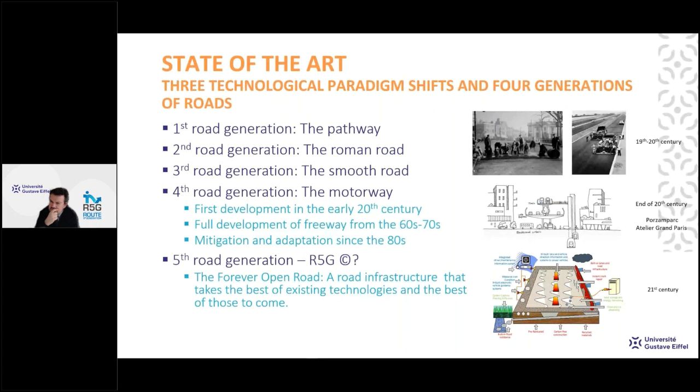That was the pitch of the Forever Open Road program, a road infrastructure that takes the best of existing technologies and the best of those to come. This was the pitch of the Forever Open Road in 2011, made by Germany, Norway, and the USA. That was the idea in 2011, in this scheme.

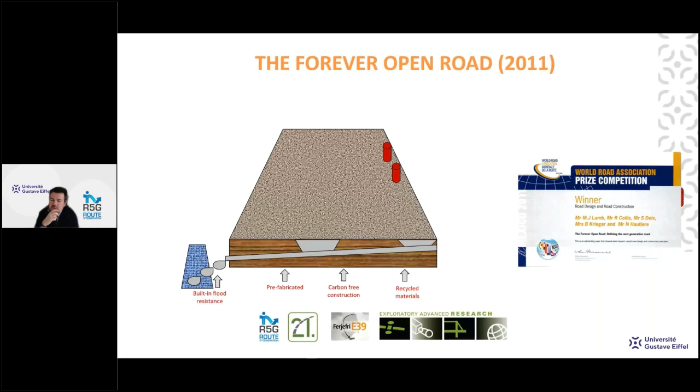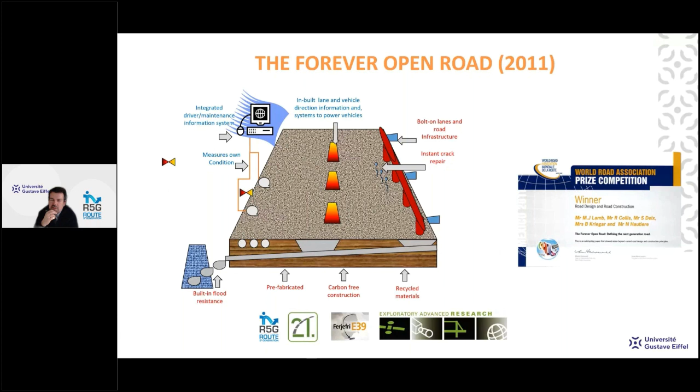The idea was to build a prefabricated road, carbon-free, made of recycled materials, resilient to extreme weather conditions, able to fix and repair cracks, to self-repair itself. It was able to include a driver guidance system, measure its own conditions, guide the vehicle, and power the vehicle—the idea of an electric road system.

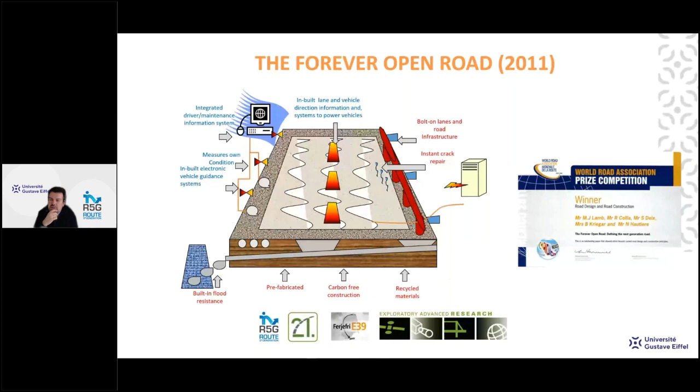This road was able to harvest and store energy—heat storage, energy harvesting, and de-icing. This concept was also able to capture CO2. This concept was a winner in 2011 at the World Road Congress for road innovation, and we've continued this program until 2021. I'll try to explain where we are heading now.

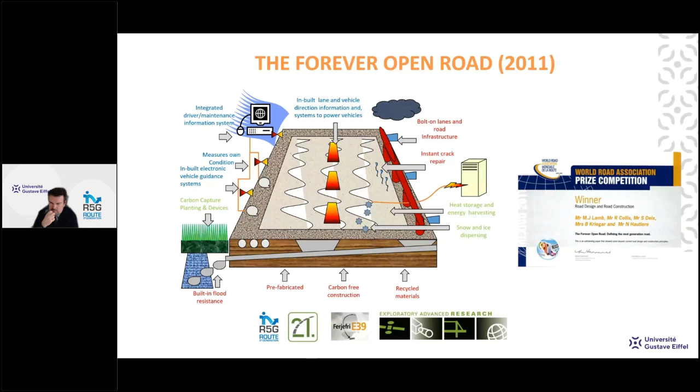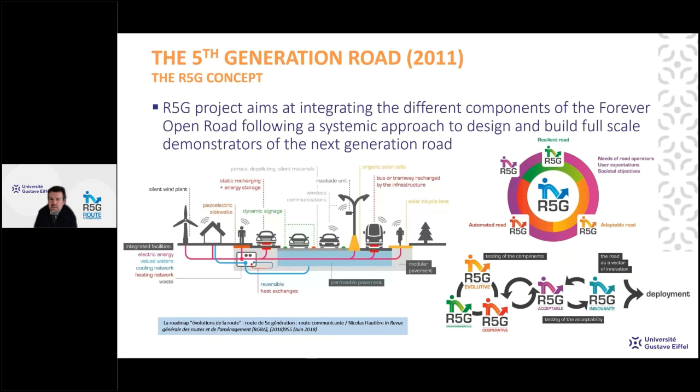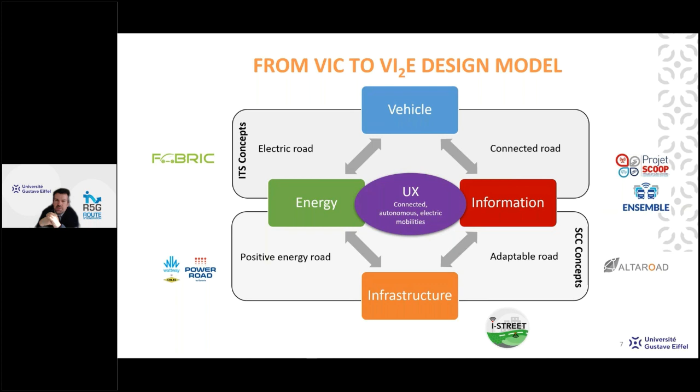Next slide, please. So there is an animation. What is the result? We are moving from the VIC model—Vehicle Infrastructure Driver model—a classical design model of a motorway fixed in the 90s, to a VI2E design model, where we have four components: the vehicle, the energy, the infrastructure, and the information.

In fact, information comes with the idea of generalized information, and energy is the way to internalize the externalities related to the motor of the vehicle. So we have different key concepts: positive energy road, electric road, connected road, and adaptable road. From a system point of view, this is how the next generation of road should be designed.

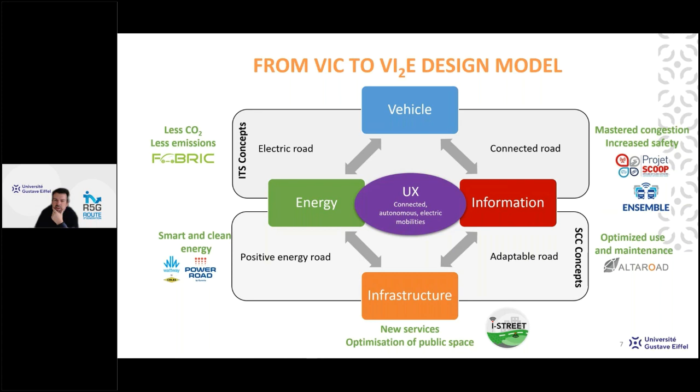So it is not a system like the VIC, it's more a system of systems approach. What we have to optimize is this system of systems, the SOS, VI2E, which paves the way for E plus C minus regulation on roads. What we have to invent is a way to regulate this model, enabled through new interactions between the components of this next generation of roads.

On one hand, the energy integrated road produces and transfers decarbonized energy to road and street components, including sensors and different systems, generating E plus and C minus. On the other hand, the automated road generates C minus through the new functions and services it implements. So our current research perspective is to develop a framework for environmental assessment, or life cycle analysis, of this system of systems.

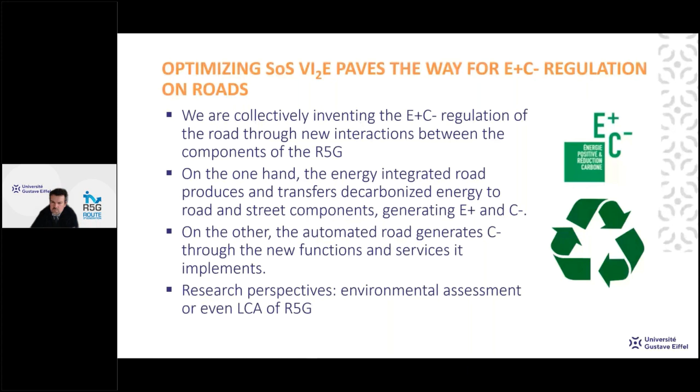So we are, and if I try to illustrate the different demonstrations and the way it is going, we try to illustrate what is happening in the country on three different aspects.

This is what we call the fabric of Route 5e Génération, the R5G Fab, which aims to accelerate the project of territories.

We have been discussing and helping cities and territories for 12 years, and this diagram shows the way we try to develop the R5G at the network level.

Vertically, you have the scale of planning of the infrastructure: the basin of mobility, the metropolis, the city, the block. Horizontally, you have the transport infrastructure hierarchy: the trans-European network, the local network, the structuring network, and the streets.

At each level, we have transformation to happen in order to move to the next generation of roads, and we must not forget the intermodal stations and also the ecological corridor.

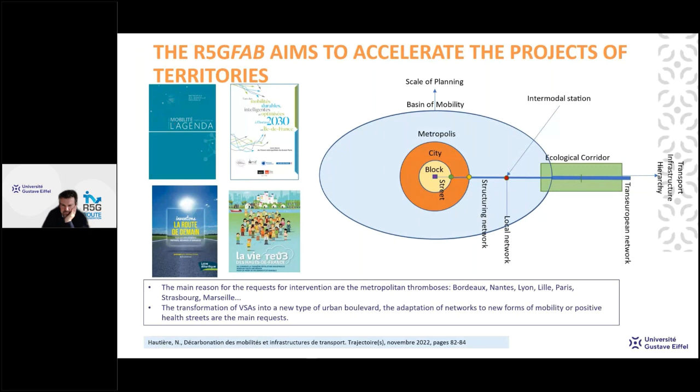I'll try to give you some examples. For instance, if we are talking about peri-urban networks, we see a movement from multimodal motorways to road trains.

At the moment, we have coaches on auxiliary lanes and carpool lanes, but with the deployment of automation and so on, we can imagine further change.

We can imagine a mix between public transport and densely occupied automated vehicles so as to still increase the capacity of existing peri-urban roads. And that was once a dream.

We can look at an old book named La Route Automatisée, published in the late 90s, which was a precursor of our activities together with VEDECOM.

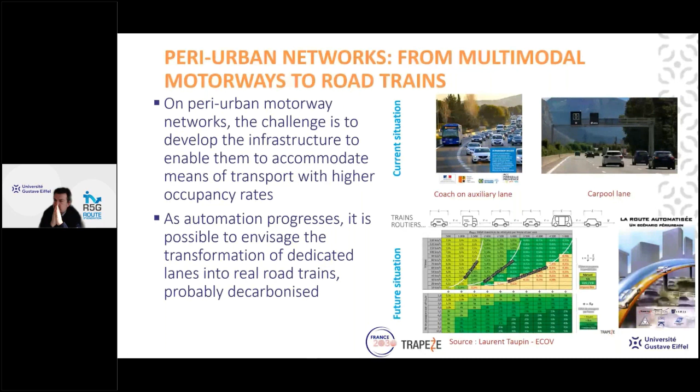If we are talking about long-haul transport networks, automation and decarbonization of freight transport are key elements. Truck platooning is still an issue worth mentioning.

Truck platooning could be a solution for the lack of drivers, and another key solution or key experiment is the electric road system, but I'll let Pierre explain these activities in more detail in his slide.

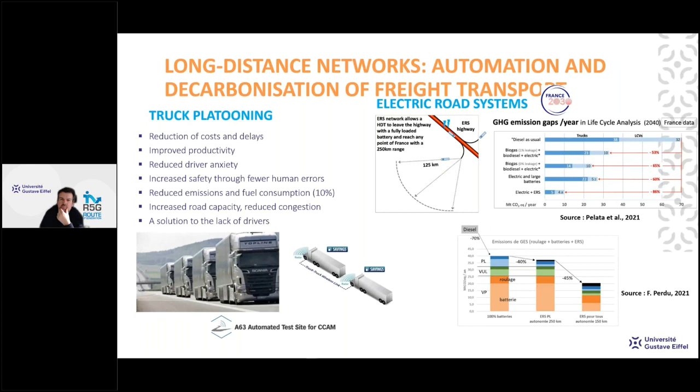On local networks, automation and decarbonization are also key technologies to improve territorial supply. We are developing work to adapt road infrastructure to autonomous shuttles.

We're also looking at how we can reuse low-circulation train lines to develop new mobility solutions, like the ferromobile solution, which uses automated road vehicles able to move on local train lines.

Those were three examples, or three domains, where we see things happening, with automation and decarbonization acting as enabling solutions to transform mobility in these territories.

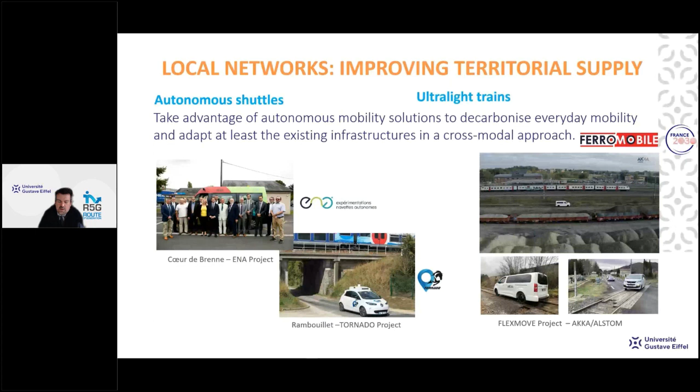This next part is more prospective but related to another view. We saw that we try to optimize the LCA of mobility, reducing the impact and improving the availability of clean energy, but we can move forward and try to develop the next step.

This VI2E framework is still insufficient, and we need to add the environment in which the road is located. We have to include the atmosphere and the green corridor surrounding the road, which creates new interactions between the road and its environment.

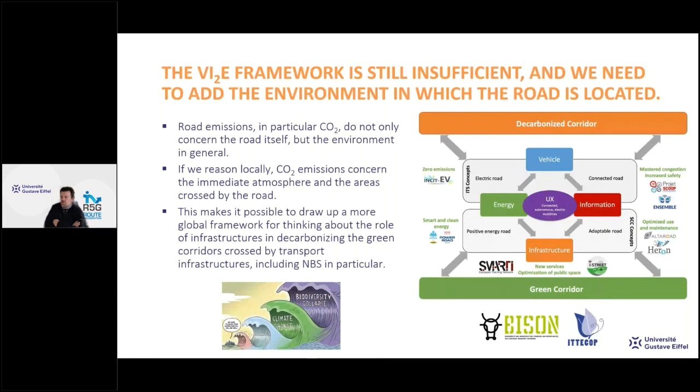In particular, we have to deal with the decline of biodiversity, and see how the road can actually be a solution to capture CO2 emissions — in fact, develop a road that consumes or stores CO2. There's reflection and work to be done in this area.

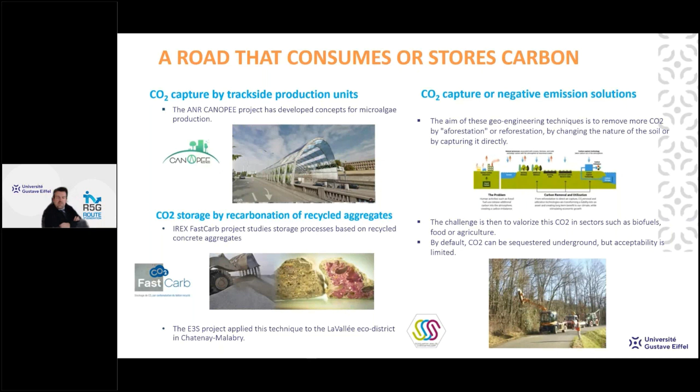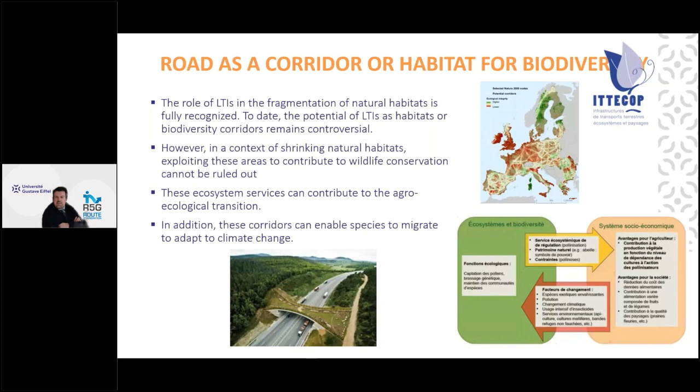In parallel, we have to see how the road can be a corridor or habitat for biodiversity — this is a European reflection on that topic. In this perspective, the systems that equip the road can be used to monitor the state of the environment and biodiversity.

For example, cameras and systems placed to monitor fog episodes, to ease and secure safe vehicle movement, can also be a solution to monitor improvements in air quality, while simultaneously observing the consequences of climate change on the territories.

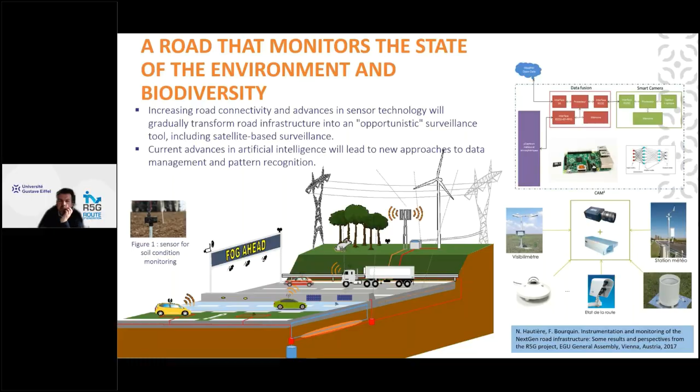So, still on time — what I wanted to say is that a new generation of roads and streets will be increasingly automated and energy-integrated so as to meet societal challenges. Our R5G project aims to design demonstrators of these next-gen roads.

Different French regions are working in this direction, especially the Île-de-France region. In intercity areas, the challenge is not only to decarbonize long-distance freight transport — a major issue — but also to rethink the relationship between freeways and territories, proposing a closer approach between town and country.

In urban environments, the challenge is to successfully transform urban arteries into health-positive streets. In this context, digital technology must be seen as an essential solution alongside new materials and processes to improve the resilience of roads to climate and man-made hazards. Thank you for your attention, and thank you for the invitation.